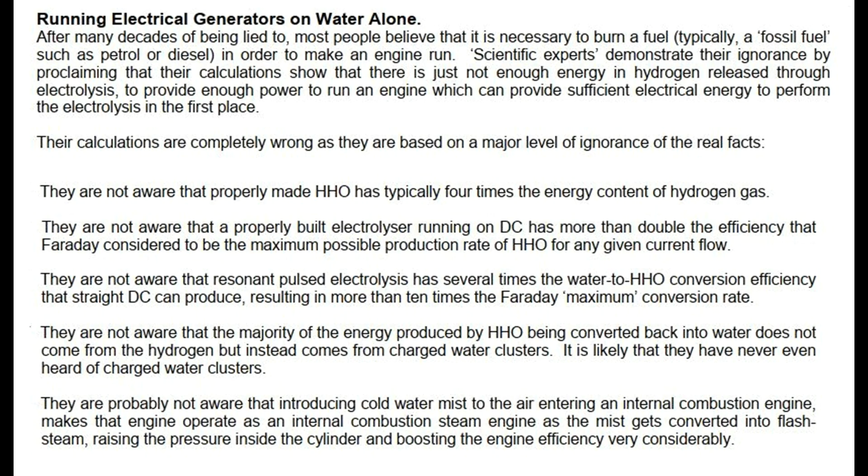They are probably not aware that introducing cold water mist to the air entering an internal combustion engine makes that engine operate as an internal combustion steam engine, as the mist gets converted into flash steam, raising the pressure inside the cylinder and boosting the engine efficiency very considerably.

Because of these things, the calculations of the scientific experts produce completely wrong results due to lack of knowledge and the flawed assumptions on which the calculations are based.

Interestingly, quite apart from the fact that generators running on water as the only visible fuel have been powering off-grid locations 24 hours 7 days a week for many years now, and ignoring that little detail, check out this newspaper comment: U.S. Navy will turn seawater into fuel.

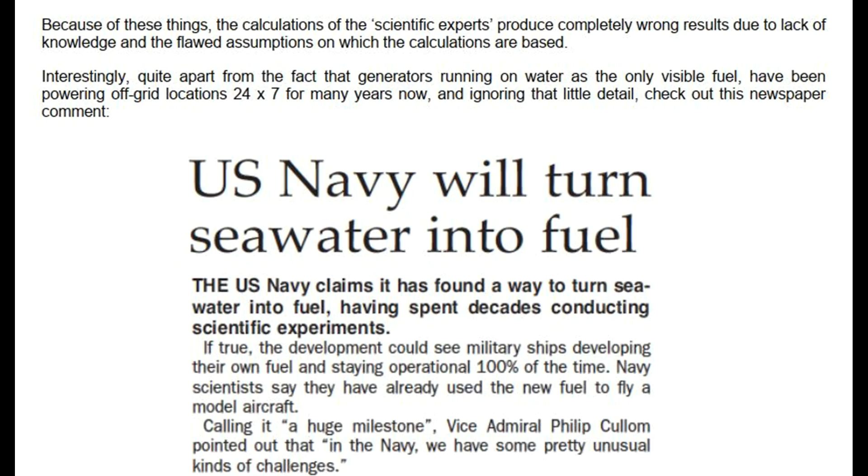The U.S. Navy claims it has found a way to turn seawater into fuel, having spent decades conducting scientific experiments. If true, the development could see military ships developing their own fuel and staying operational 100% of the time. Navy scientists say they have already used the new fuel to fly a model aircraft. Calling it a huge milestone, Vice Admiral Philip Cullom pointed out that in the Navy, we have some pretty unusual kinds of challenges. One of these is the need at present to refuel from an oil tanker. But developing a game-changing technology like seawater to fuel reinvents a lot of the way we can do business when you think about logistics readiness, said Cullom.

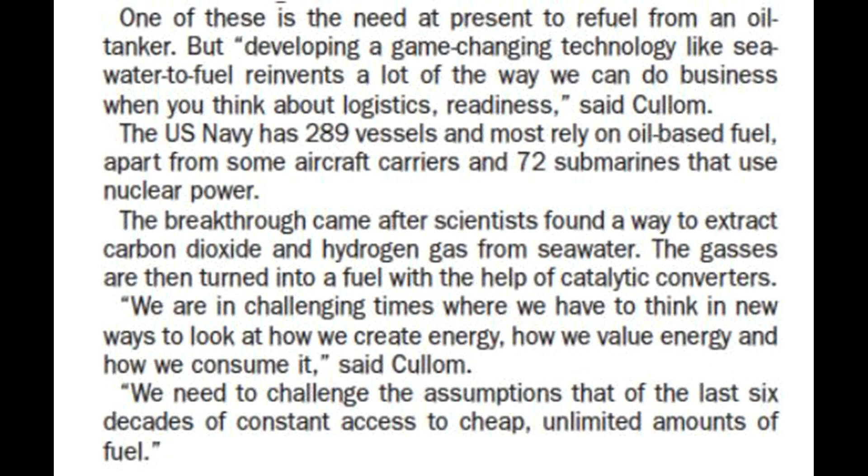The U.S. Navy has 289 vessels, and most rely on oil-based fuel, apart from some aircraft carriers and 72 submarines that use nuclear power. The breakthrough came after scientists found a way to extract carbon dioxide and hydrogen gas from seawater. The gases are then turned into fuel with the help of catalytic converters. We are in challenging times where we have to think in new ways to look at how we create energy, how we value energy and how we consume it, said Cullom. We need to challenge the assumptions of the last 6 decades of constant access to cheap, unlimited amounts of fuel.

This is a very interesting comment from Vice Admiral Cullom. Firstly, he confirms that the Navy's massive engines can be powered by gas produced by electrolysis. Second, he implies very strongly that refueling with oil-based consumables is no longer needed, and that means that the electrolysis is well in excess of 100% efficient, making those massive engines self-powered. Third, it seems reasonable to presume that if those massive engines can be self-powered through electrolysis, that the very much smaller engines in cars could also be run on electrolysis, even if the same method of electrolysis were not used.

Anyway, we have to deal with the tiny, very inefficient motors which are used in generators which normally use petrol as the fuel. In the UK, 3 men managed to run a generator on water alone, using just simple things which are within the scope of the average handyman in his workshop.

They bought a standard petrol-driven electrical generator off eBay and managed to run it without using any petrol. They used a HHO gas flow which they measured at just 3 liters per minute, and they test-loaded the 5.5 kilowatt generator with 4 kilowatts of equipment.

Afterwards they abandoned the generator and moved on to a much bigger engine, as their plans are to sell electricity to the local power company. Their representative said the equipment was put together by his associate, who supplied the water electrolyte, not a standard electrolyte, at 0.4% by volume. It was a 5 kilowatt petrol generator, about 300 cubic centimeters.

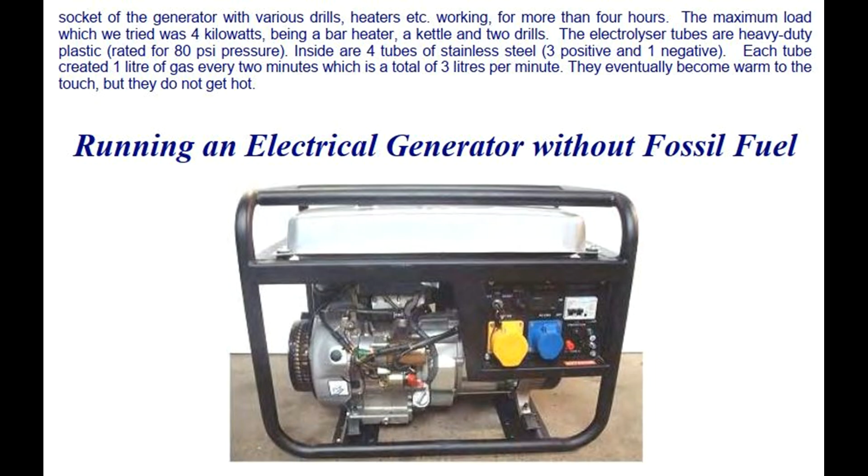Running an electrical generator without fossil fuel, in broad outline: in order to achieve this objective, very much like Stan Meyer, we need to feed the engine 3 things. Air, fed in as normal through the existing air filter. HHO gas, how to make this has already been explained in considerable detail. And a mist of very small water droplets, sometimes called cold water fog.

Also, we need to make 2 adjustments to the engine. The spark timing needs to be retarded by about 11 degrees. If there is a waste spark, then that needs to be eliminated.

To summarize then, a good deal of work needs to be done to achieve this effect. An electrolyzer needs to be built or bought, although the required gas production rate is not particularly high. A generator of cold water fog needs to be made or bought. Pipes need to be installed to carry these 2 items into the engine. The engine timing needs to be retarded. Any waste spark needs to be suppressed.

Water tanks are needed for the cold water fog and to keep the electrolyzer topped up. Ideally, some form of automatic water refill for these water tanks should be provided so that the generator can run for long periods unattended. If we omit the electrical safety equipment which has already been explained in detail, and omit the HHO gas safety equipment which has already been explained in detail, and skip the automated water supply details and the starting battery, then a generalized sketch of the overall arrangement looks like this.

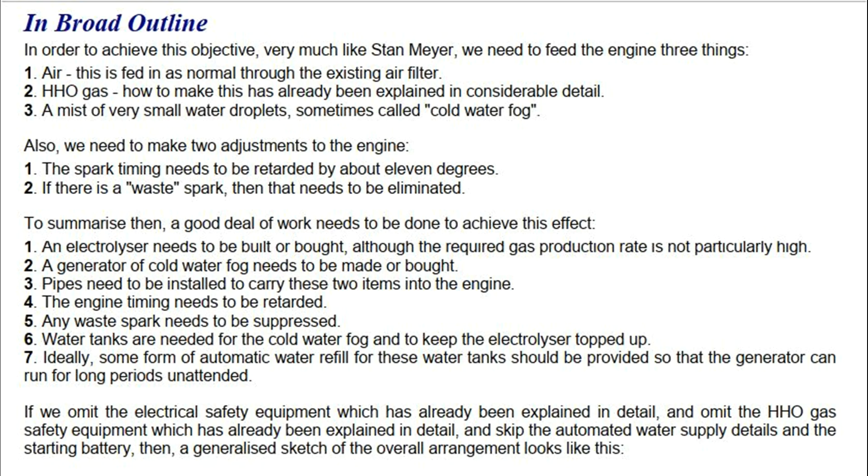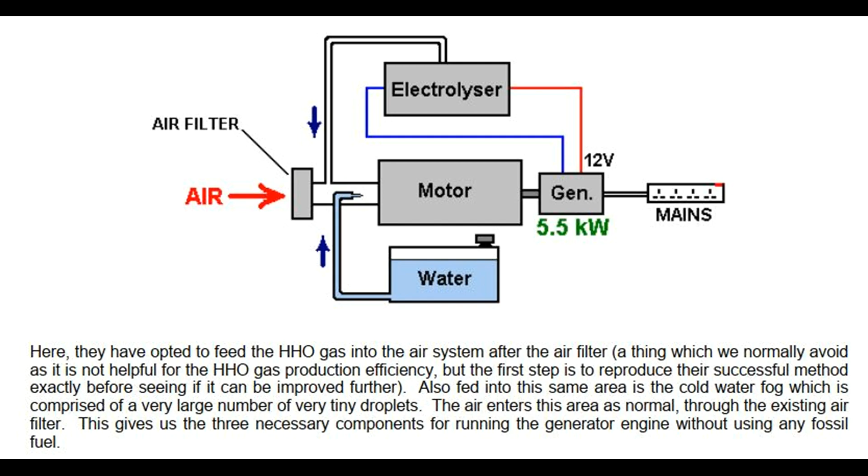Here, they have opted to feed the HHO gas into the air system after the air filter, a thing which we normally avoid as it is not helpful for the HHO gas production efficiency, but the first step is to reproduce their successful method exactly, before seeing if it can be improved further. Also fed into this same area is the cold water fog, which is comprised of a very large number of very tiny droplets. The air enters this area as normal, through the existing air filter. This gives us the 3 necessary components for running the generator engine without using any fossil fuel.

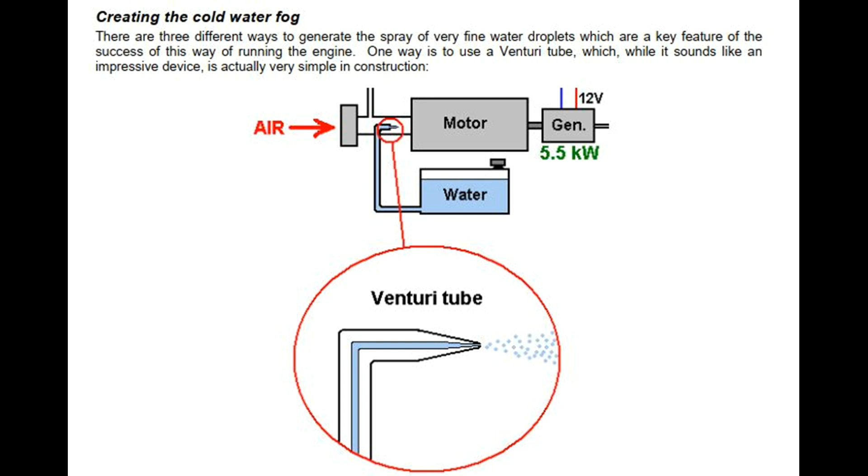Creating the cold water fog: there are 3 different ways to generate the spray of very fine water droplets, which are a key feature of the success of this way of running the engine. One way is to use a Venturi tube, which, while it sounds like an impressive device, is actually very simple in construction. It is just a pipe which tapers to a point and which has a very small nozzle.

As the engine draws in the air HHO mix on its intake stroke, the mixture rushes past the nozzle of the Venturi tube. This creates an area of lower pressure outside the nozzle and causes water to exit through the nozzle in a spray of very fine droplets. Some perfume spray bottles use this method as it is both cheap and effective.

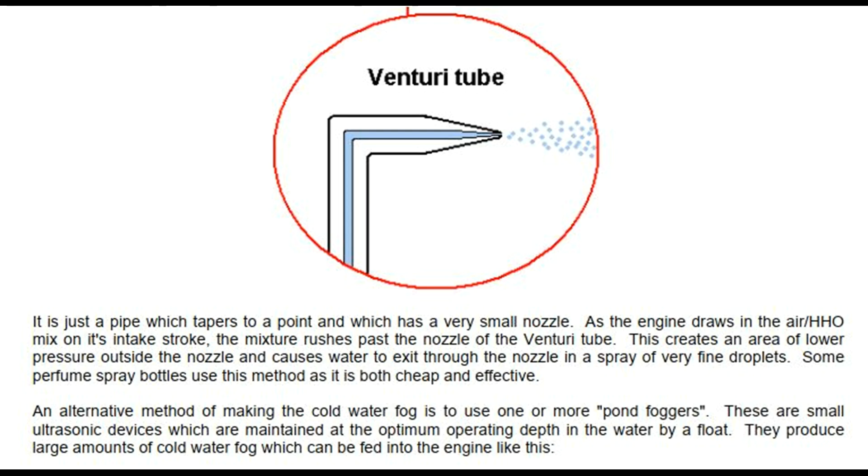An alternative method of making the cold water fog is to use 1 or more pond foggers. These are small ultrasonic devices which are maintained at the optimum operating depth in the water by a float. They produce large amounts of cold water fog which can be fed into the engine like this. A third method is to use a small carburetor of the type used with model aircraft.

This does the same job as a regular engine carburetor, feeding a spray of tiny water droplets into the engine air intake. The physical arrangement of this option depends on the construction of the air filter of the generator being modified. You will notice that the people in the UK who did this used a small gas tank with an 18 pounds per square inch pressure release valve.

This is not possible with the highest quality of HHO gas as it cannot be compressed that much. However, with a lower grade of HHO which has some water vapor mixed in with it, it is possible to have a gas reservoir with that sort of pressure in it. In this case, except possibly for starting, their gas production rate is probably not high enough to allow much raised pressure inside the tank. Obviously, the gas pressure switch on the electrolyzer and the one on the gas storage tank will have similar operational pressures.

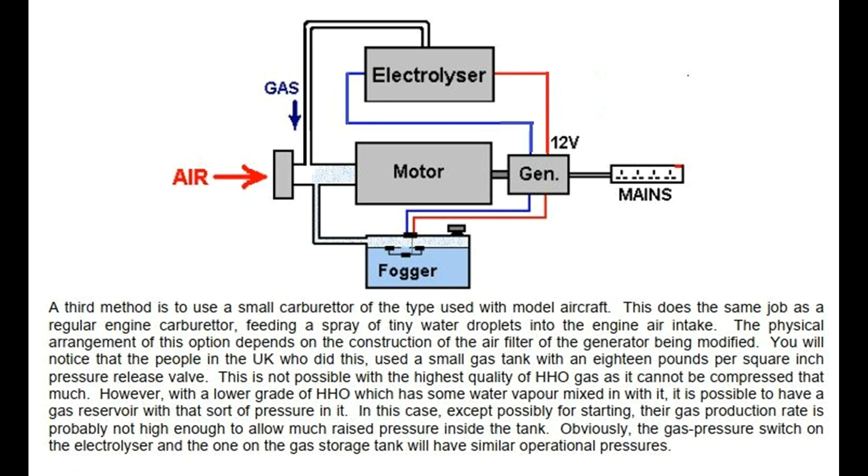Some safety features. Up to this point, the electrolyzer has been shown in bare outline. In practice, it is essential that some safety features are incorporated as shown here. These safety devices should be familiar to you by now as they have already been explained earlier in this document.

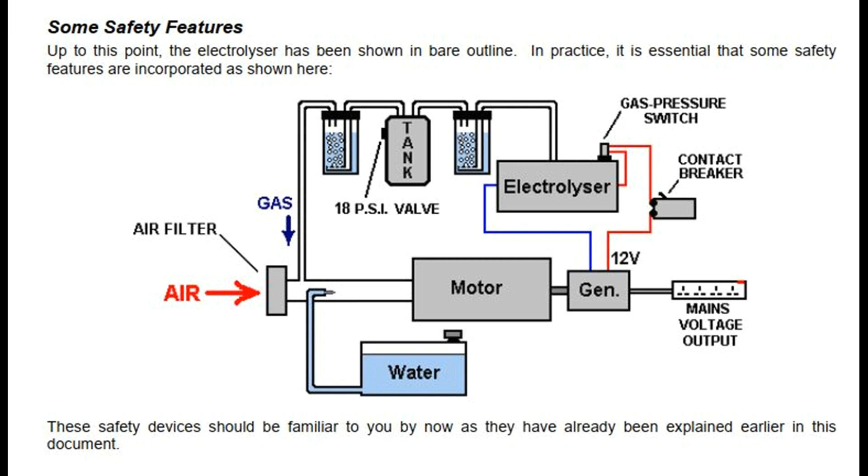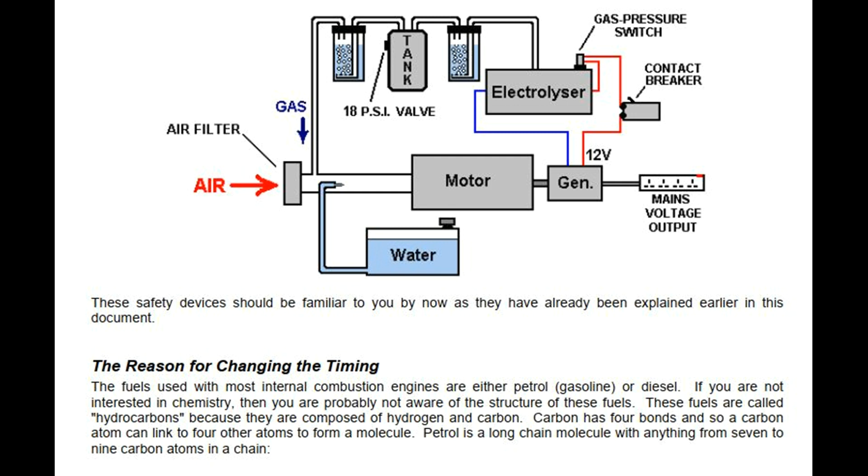The reason for changing the timing. The fuels used with most internal combustion engines are either petrol, gasoline, or diesel. If you are not interested in chemistry, then you are probably not aware of the structure of these fuels. These fuels are called hydrocarbons because they are composed of hydrogen and carbon. Carbon has 4 bonds and so a carbon atom can link to 4 other atoms to form a molecule. Petrol is a long chain molecule with anything from 7 to 9 carbon atoms in a chain. Diesel has the same structure but with 11 to 18 carbon atoms in a chain.

In a petrol engine, a fine spray of petrol is fed into each cylinder during the intake stroke. Ideally, the fuel should be in vapor form, but this is not popular with the oil companies because doing that can give vehicle performances in the 100 to 300 miles per gallon range, and that would cut the profits from oil sales. The petrol in the cylinder is compressed during the compression stroke and that reduces its volume and raises its temperature substantially. The air-fuel mix is then hit with a powerful spark and that provides enough energy to start a chemical reaction between the fuel and the air.

Because the hydrocarbon chain is such a large molecule, it takes a moment for that chain to break up before the individual atoms combine with the oxygen in the air. The main engine power is produced by the hydrogen atoms combining with oxygen, as that reaction produces a large amount of heat. The carbon atoms are not particularly helpful, forming carbon deposits inside the engine, not to mention some carbon monoxide, CO, and some carbon dioxide, CO2, as well.

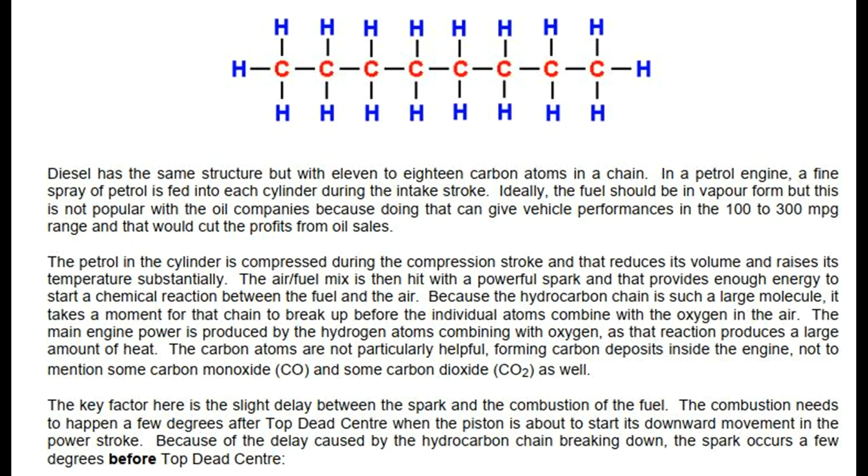The key factor here is the slight delay between the spark and the combustion of the fuel. The combustion needs to happen a few degrees after top dead center when the piston is about to start its downward movement in the power stroke. Because of the delay caused by the hydrocarbon chain breaking down, the spark occurs a few degrees before top dead center.

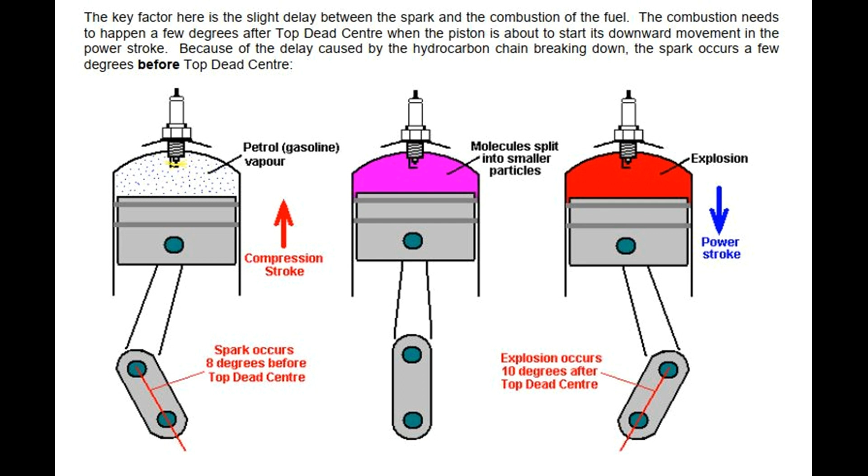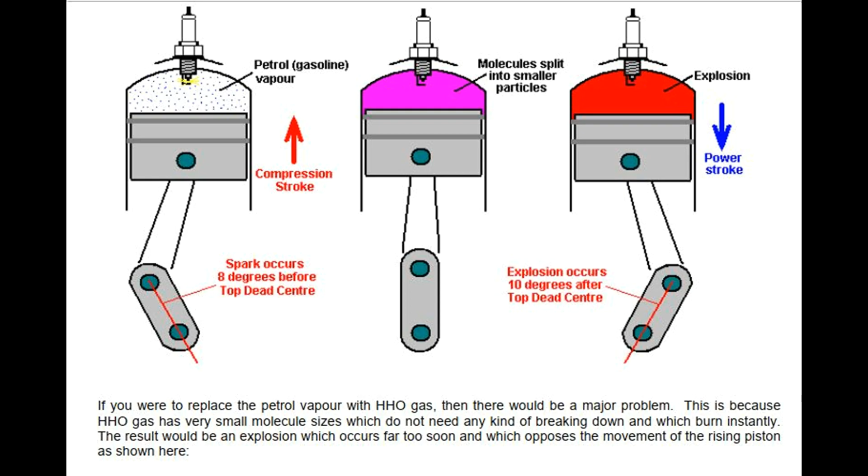If you were to replace the petrol vapor with HHO gas, then there would be a major problem. This is because HHO gas has very small molecule sizes which do not need any kind of breaking down and which burn instantly. The result would be an explosion which occurs far too soon and which opposes the movement of the rising piston, as shown here. The forces imposed on the piston's connecting rod would be so high that it would be quite liable to break and cause additional engine damage.

In the case of our electrical generator, we will not be feeding it a mix of air and HHO gas, but instead a mix of air, HHO gas, and cold water fog. This delays the combustion of the HHO gas by a small amount, but it is still important to have the spark occur after top dead center, so the ignition of the generator needs to be retarded by 11 degrees.

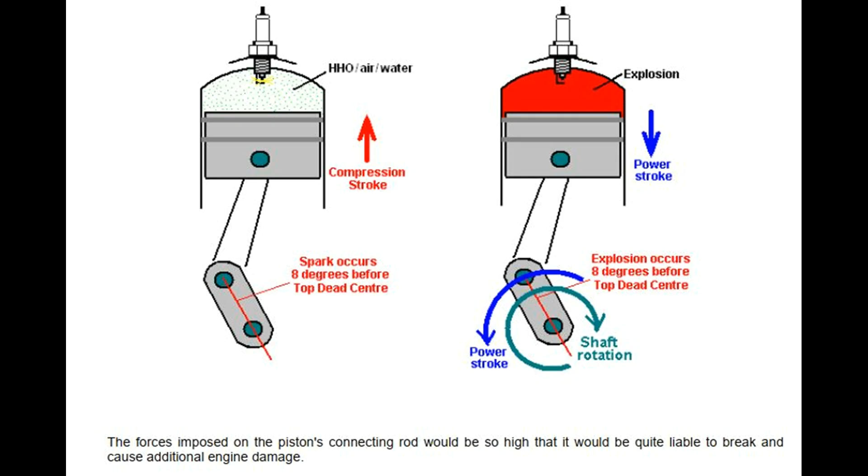Engine design varies considerably in ways which are not obvious to a quick glance at the engine. The timing of the valves is a big factor here. In the smallest and cheapest engines, the engine design is simplified by not having the spark timing taken off the camshaft. Instead, production costs are cut by taking the spark timing off the output shaft. This produces a spark on every revolution of the engine. But if it is a 4-stroke engine, the spark should only occur on the power stroke, which is every second revolution of the output shaft.

If the fuel is petrol, then this does not matter as the extra spark will occur near the end of the exhaust stroke when only burnt gases are present in the cylinder.

Some people are concerned when they think of HHO gas burning and producing water inside the engine. They think of hydrogen embrittlement and rusting. However, because of the nature of the hydrocarbon fuel already being used, the engine runs primarily on hydrogen anyway, and it always has produced water.

The water is in the form of very hot vapor or steam, and the engine heat dries it out when the engine is stopped. Hydrogen embrittlement does not occur as a result of using a HHO gas booster.

If we were to delay the spark until after top dead center, as we must, the situation is quite different, as the waste spark will also be delayed by the same amount. With most engines, at this point the exhaust valve will have closed and the intake valve opened. Our flammable gas mix will be fed into the engine on its intake stroke, meaning our gas supply system is openly connected to the cylinder through the open intake valve. The waste spark would ignite our gas supply system as far as the bubbler, which would smother the flashback. The situation is shown here. We definitely do not want that to happen, so it is very important that we suppress that additional waste spark.

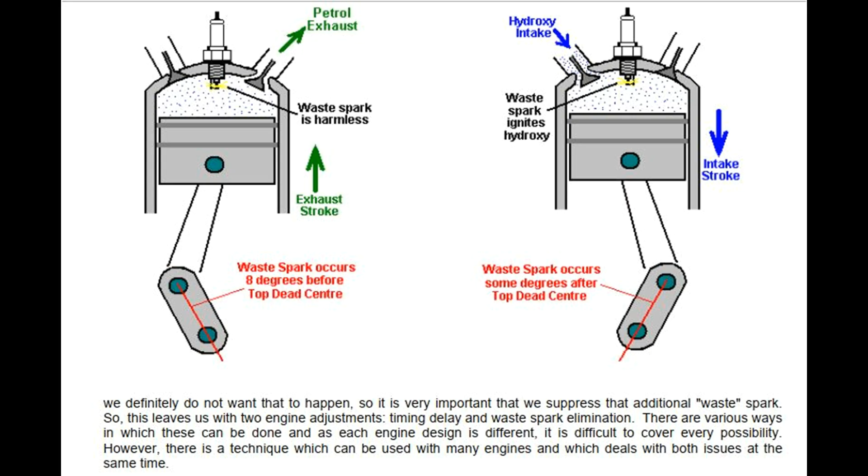Most engines of this type are four-stroke engines with intake and exhaust valves, perhaps something like this. The intake valve, shown on the right in this illustration, is pushed down by a camshaft, compressing the spring and opening the inlet port. The exact arrangement will differ from one engine design to the next, but what is fixed is the movement of the valve itself, and that movement only takes place every second revolution. There are various ways of using that movement to eliminate the waste spark and retard the timing.

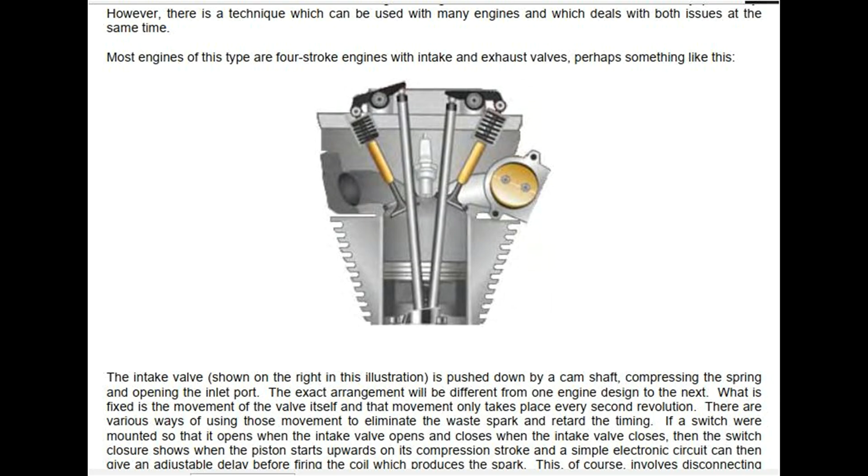If a switch were mounted so that it opens when the intake valve opens and closes when the intake valve closes, then the switch closure shows when the piston starts upwards on its compression stroke, and a simple electronic circuit can then give an adjustable delay before firing the coil which produces the spark. This involves disconnecting the original electrical circuit so that no waste spark is generated. The current flowing through the switch contacts can be arranged to be so low that there will be no sparking at the contacts when the circuit is broken again.

If the engine did not have a waste spark, then in theory the timing mechanism of the engine could be used to retard the spark. However, in practice, the timing mechanism is almost never capable of retarding the spark to the position needed for running without fossil fuel, so some kind of delay circuit will be needed anyway.

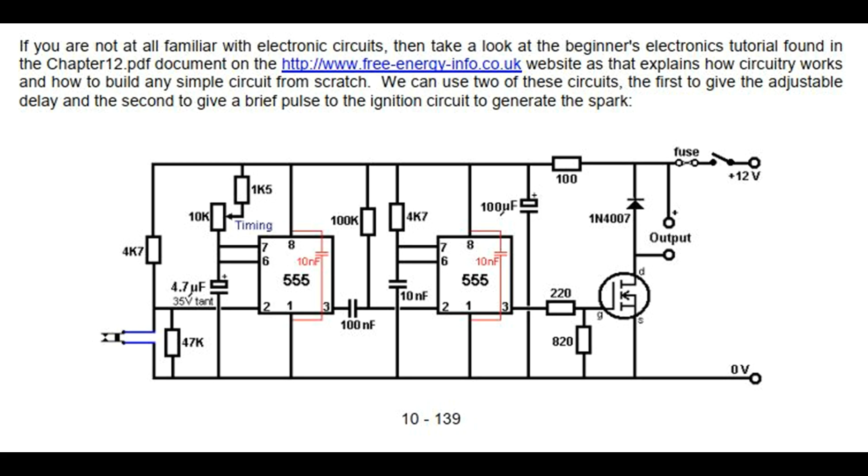We can use two of these circuits: the first to give the adjustable delay, and the second to give a brief pulse to the ignition circuit to generate the spark.

Making the HHO gas. When the generator is running, we have a ready supply of electrical energy coming from equipment specifically designed to supply large quantities of electricity for any required application. We are not dealing with the spare capacity of some low-grade alternator in a car, but substantial electrical power available. Having said that, the electrolyzers described at the start of this document are efficient, and it is unlikely that an excessive amount of power would be needed when using one of those designs.

Another convenient factor is that this is a stationary application, so the size and weight of the electrolyzer is not at all important, and this gives us further flexibility in our choice of dimensions.

As this is an application where it is highly likely that the electrolyzer will be operated for long periods unattended, an automated water supply system should be provided. The main details of such a system have already been covered, but what has not yet been dealt with is the switching for the water pump.

The water pump itself can be an ordinary windscreen washer pump, and we need some form of switch which operates on the electrolyte level inside the electrolyzer. It is sufficient to sense the level in just one of the cells, as the water usage will be pretty much the same in every cell.

If you make the electrolyzer in a suitable size or shape, then a simple off-the-shelf miniature float switch can be used. If you prefer, an electronic level sensor can be operated, using 2 bolts through the side of the electrolyzer as the level sensor. A suitable circuit for this simple switching task could be used.

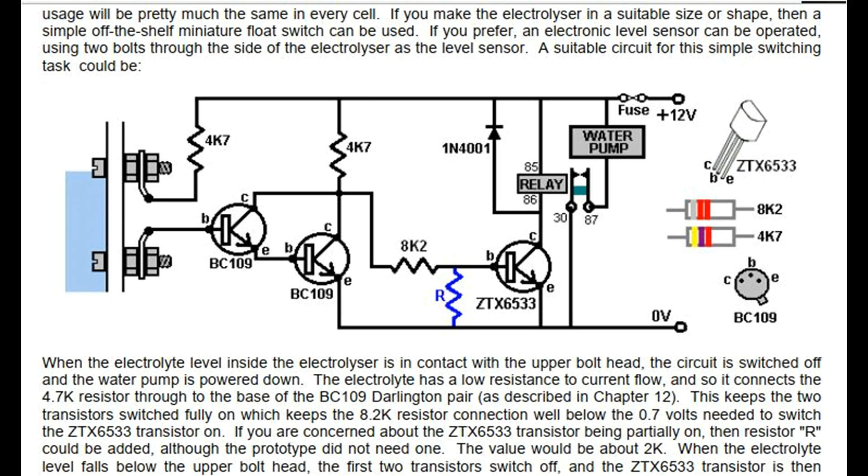When the electrolyte level falls below the upper bolt head, the first 2 transistors switch off, and the ZTX6533 transistor is then powered fully on by the 4.7 kilo-ohm resistor and the 8.2 kilo-ohm resistor in series, providing the 150 milliamps needed for the relay to be switched fully on. The circuit draws about 5 milliamps in its standby state.

The numbers on the relay symbol correspond to the numbers on a typical automotive 12-volt relay. Using 2 BC109 transistors as the front end allows the circuit to be used with tap water if you wish.

However, the water level control for the water supply to the pond fogger or Venturi tube misting device does not need any form of fancy mechanism. The standard ball-cock valve mechanism used with toilets is quite adequate, especially if a floating pond fogger is being used, as it maintains its own optimum depth below the surface, so the overall depth is not critical.

Starting: when left for any length of time, the gas pressure inside the electrolyzer will drop because the nature of the HHO gas alters. This means there will not be sufficient HHO gas available to start the engine, and no more gas will be generated until the engine drives the generator.

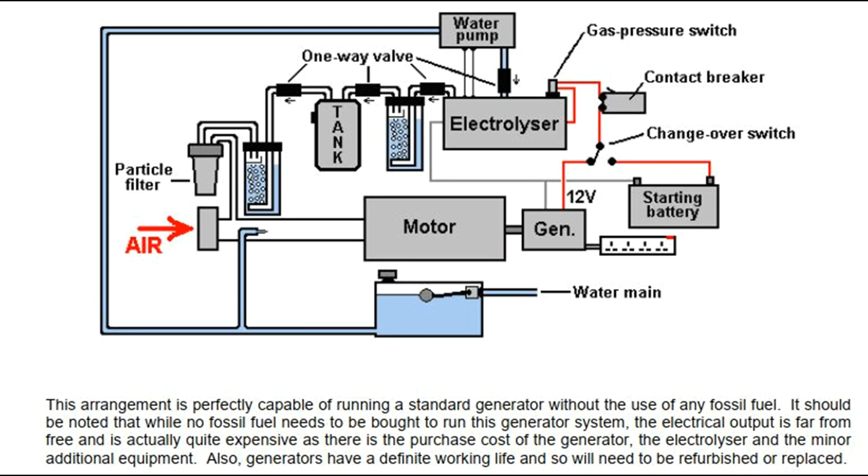The alteration was achieved by cutting a new channel in the shaft, allowing the timing disc to be positioned further around the shaft, producing the required timing delay. This arrangement also makes the waste spark ineffective, so it can be ignored. While this method requires the cutting of a slot, it does away with the need for any electronics, and it is a very simple solution.

If you feel that the construction of a suitable electrolyzer would be a problem, or that the amount of electric current needed to operate it would be excessive, let me show you the actual figures involved. Michael Faraday was an exceptional and highly respected researcher who investigated the electric current needed to convert water into hydrogen gas and oxygen gas by electrolysis.

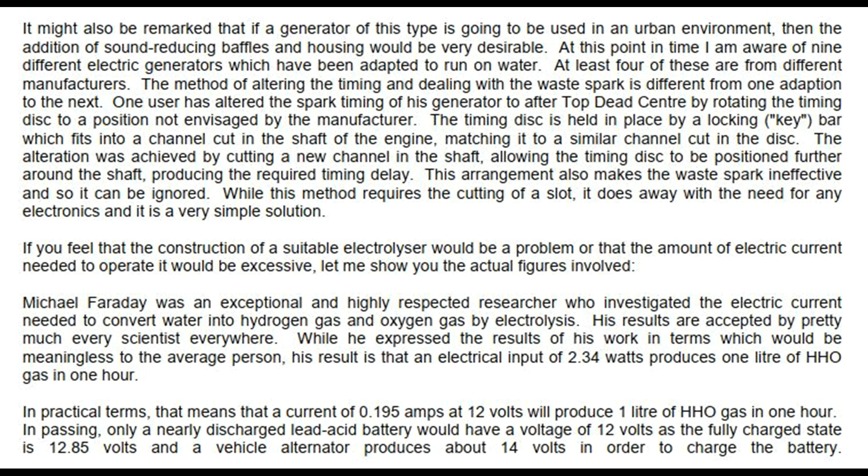His results are accepted by pretty much every scientist everywhere. While he expressed the results of his work in terms which would be meaningless to the average person, his result is that an electrical input of 2.34 watts produces 1 liter of HHO gas in 1 hour. In practical terms, that means that a current of 0.195 amps at 12 volts will produce 1 liter of HHO gas in 1 hour.

Only a nearly discharged lead-acid battery would have a voltage of 12 volts, as the fully charged state is 12.85 volts, and a vehicle alternator produces about 14 volts in order to charge the battery. It is easier then to compare the gas output of electrolyzers directly to the figures produced by Faraday, based on a gas output of 15 liters per minute, which is 900 liters per hour.

Faraday: 900 liters in 1 hour takes 2106 watts, or 100% Faraday. Boyce: 900 liters in 1 hour takes 998 watts, or 211% Faraday without pulsing. Boyce: 900 liters in 1 hour takes 180 watts, or 1170% Faraday with pulsing. Cramton: 900 liters in 1 hour takes 90 watts, or 2340% Faraday.

Much of this is not very important, as it has been demonstrated that a gas production rate of around 3 liters per minute, 180 liters per hour, is sufficient to run a generator which produces 5,500 watts. Let us assume that the measured figure is 100% wrong and that it takes 360 liters per hour of HHO gas, plus cold water fog, plus air, to run the generator. Then Faraday would need 843 watts.

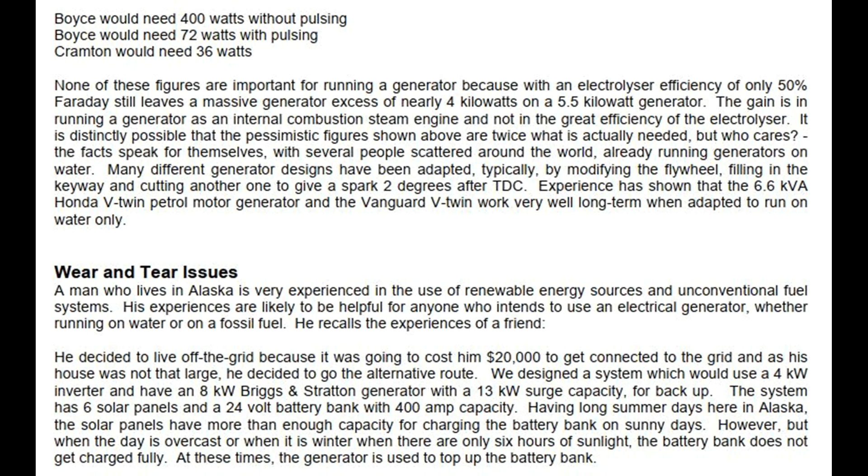American generators normally have either 2 or 4 120-volt outputs each rated at 15 amps, plus one 240-volt output rated at 33 amps. If one of the two 120-volt outputs is used to charge the battery bank, then you're left with just the other 120-volt output for any other power needs during charging. This is not satisfactory, as operating with one field at maximum power and the other lightly loaded or unused causes a field imbalance in the generator, engine crank imbalance, and ring or regulator failure within 6 months. It also causes noisy running and excessive fuel consumption.

Run in this way, providing a 60 amp charge rate, the generator ran hard and loud for 2 to 2.5 hours per day, and running it was costing $350 per month for gasoline. The generator failed after 4 months. In order to balance the loading on the replacement generator, a 15 kVA step-down transformer costing less than $1,000 was purchased so that the 240-volt output could be used to drive 120-volt equipment.

A transformer used for this needs to have a power handling capacity greater than the surge capacity of the generator. A major advantage is that the generator current is halved for any given level of equipment current drawn, because the equipment is running at only half of the generator voltage.

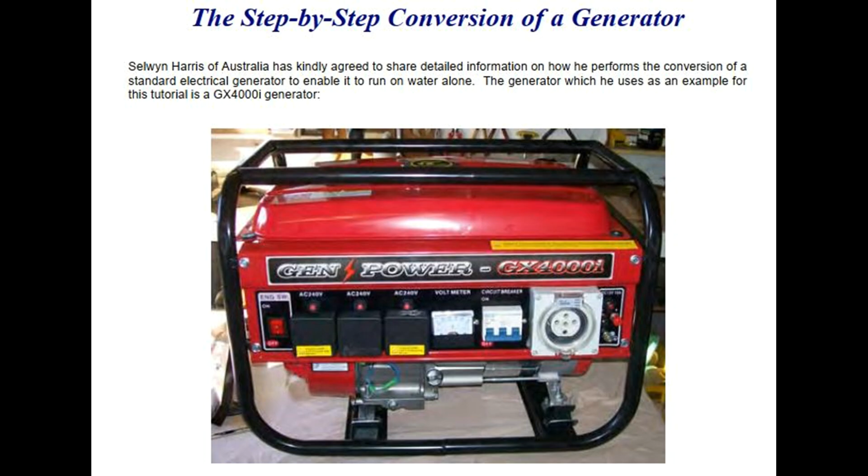GX4000i portable type generators have smoother output power, comparable to public utility sources. Ideal for powering medium loads such as power tools, both single and 3-phase, game consoles, digital cameras, laptops, camcorders, lighting, microwave ovens, drills, grinders, and resistive load kitchen appliances such as coffee makers and toasters. Also suitable for emergency home backup power where 240-volt power is required. These units are also significantly quieter than others due to refined engine technology.

Features: commercial grade engine, 196 cubic centimeter 4-stroke, 7 horsepower, overhead camshaft, TCI ignition. Maximum output 4.0 kV ampere at 240 or 415 volts AC, rated output 2.7 kilowatts. Quality heavy-duty construction, AVR auto voltage regulator, 3 240-volt and 1 415-volt protected outlets, 100% pure copper core, gearless direct drive, robust square frame design, easy recoil start. Oil capacity 0.7 liters, powder coated finish, light and compact for easy maneuverability at 38.5 kilograms, noise level 69 decibels.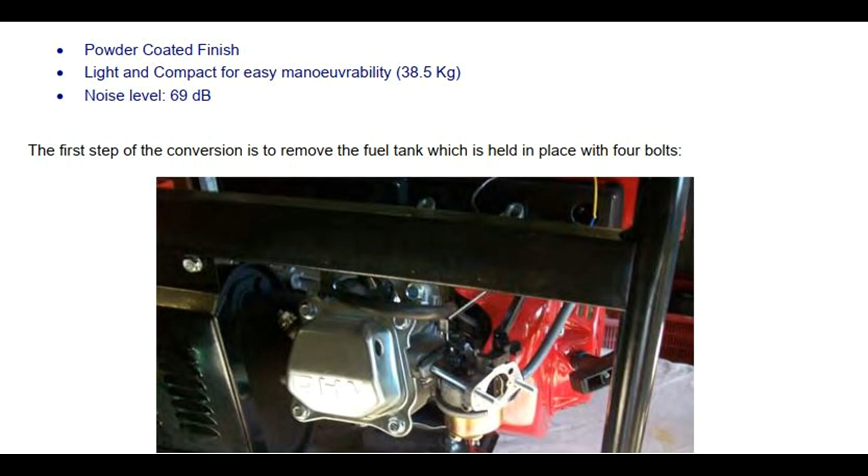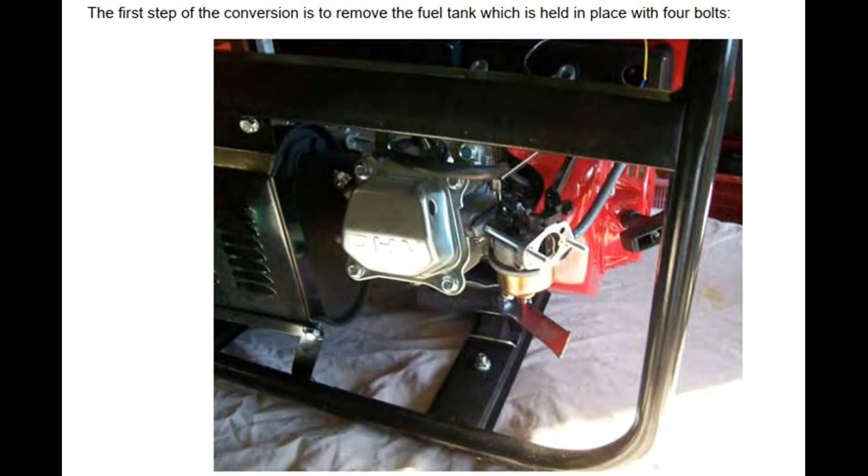The first step of the conversion is to remove the fuel tank, which is held in place with 4 bolts. This allows access to the carburetor, which is then removed as it will not be used.

The next step is to construct a pressure release valve mechanism which will protect the equipment from damage in the unlikely event of a major, sudden rise in pressure caused by the unwanted ignition of the HHO gas mix used to power the generator. For this, parts are purchased from the local hardware store.

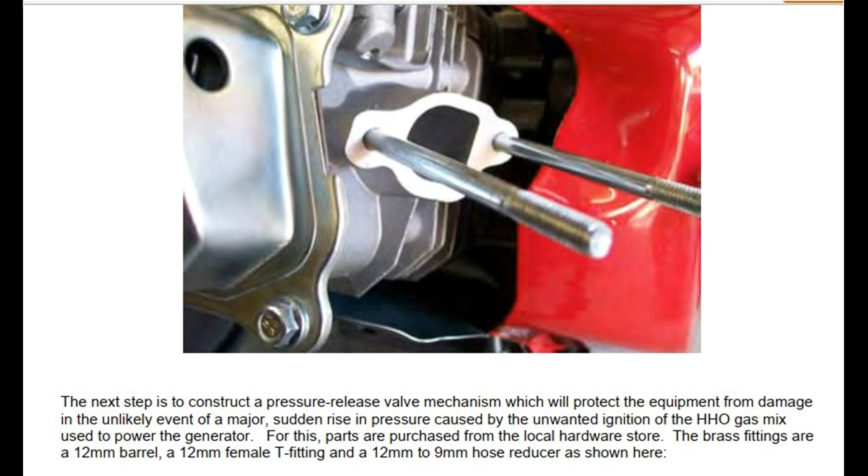The brass fittings are a 12mm barrel, a 12mm female T-fitting, and a 12mm to 9mm hose reducer, as shown here. The polyvinyl chloride plastic fittings are a 1/2 to 1-1/4 reducer and a 1-1/4 end cap, along with the roller ball from an old-fashioned mouse and a relatively weak compression spring to hold the ball in place during normal operation where the gas pressure is low.

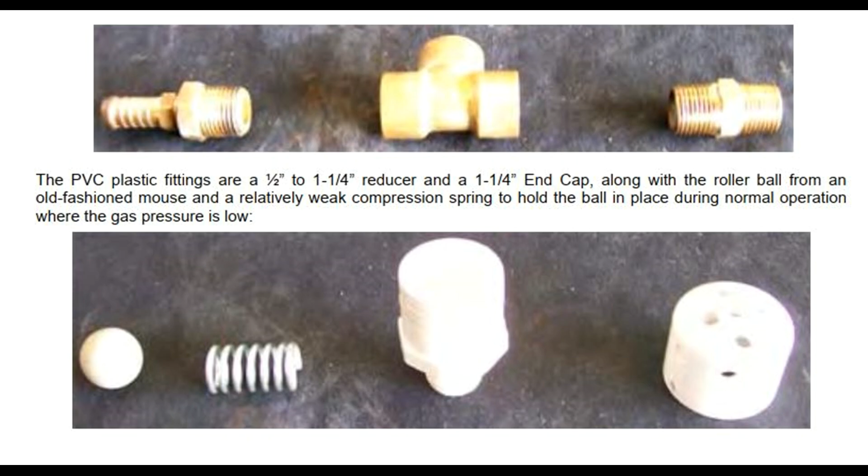These components are then assembled to produce the pressure release valve. The inside of the flash arrestor looks like this: drilled vent holes, polyvinyl chloride cap, weak spring, roller ball, and female thread brass T-piece.

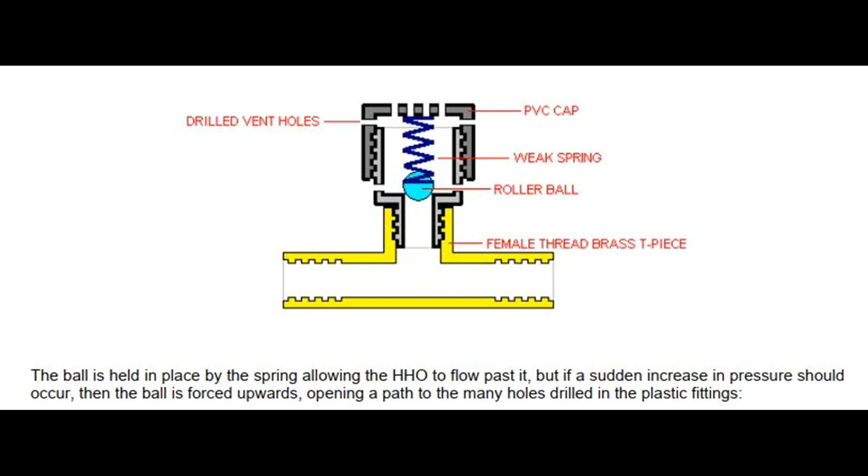The ball is held in place by the spring, allowing the HHO to flow past it, but if a sudden increase in pressure should occur, the ball is forced upwards, opening a path to the many holes drilled in the plastic fittings. When the gas pressure drops again, the spring pushes the roller ball down to seal off the pressure release holes.

However, Selwyn adds an additional spring-loaded valve to the arrangement. This one is there in case the electrolyzer fails to produce a sufficient volume of gas in the event of a sudden increase in demand. This valve is marked as a vacuum relief valve, although, strictly speaking, it deals with reduced pressure rather than an actual vacuum. The arrangement is shown below.

Please take note that Selwyn uses the Hogg style of electrolyzer, and that design has a bubbler built into it, so if you are using some other design of electrolyzer, please be sure to use at least one bubbler between the electrolyzer and the engine, in spite of the fact that there is very little chance of the engine misfiring and igniting the HHO gas in the electrolyzer.

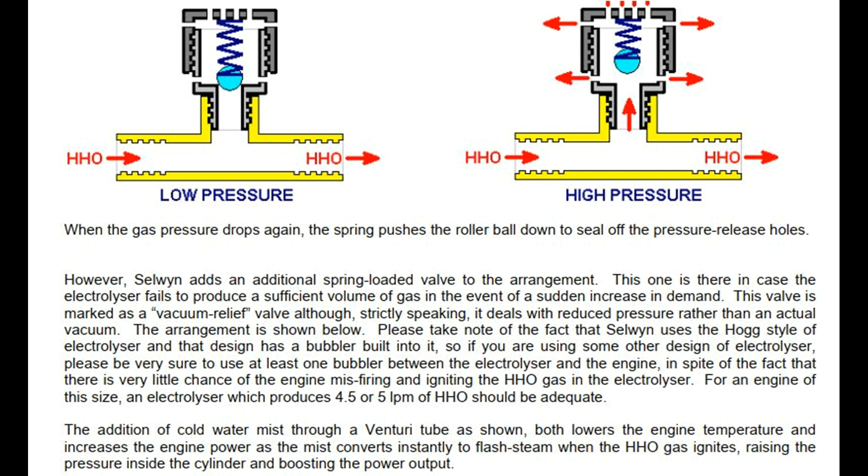For an engine of this size, an electrolyzer which produces 4.5 or 5 liters per minute of HHO should be adequate. The addition of cold water mist through a Venturi tube, as shown, both lowers the engine temperature and increases the engine power, as the mist converts instantly to flash steam when the HHO gas ignites, raising the pressure inside the cylinder and boosting the power output.

Next, a piece of 6 mm thick aluminium plate is cut and shaped to the size of the carburetor gasket, which is not a symmetrical item. This is done by tracing the gasket and transferring it onto the aluminium plate, drilling the holes, and then cutting out the outlined shape. The edges are then filed to create a nice fit on the engine port.

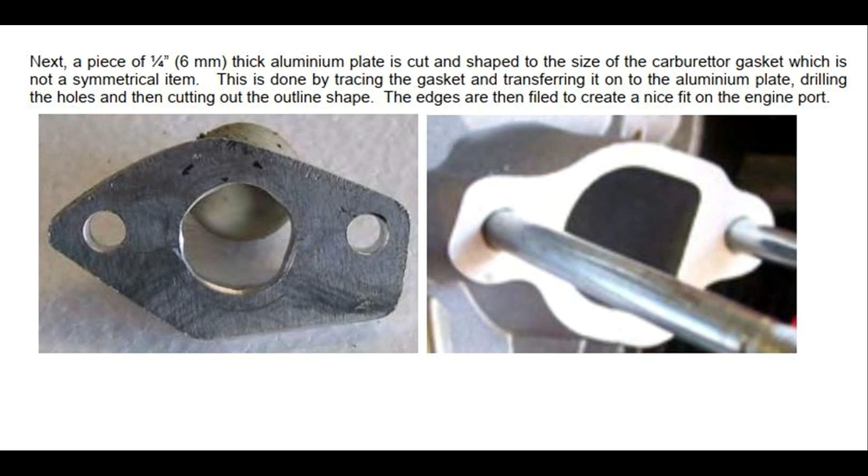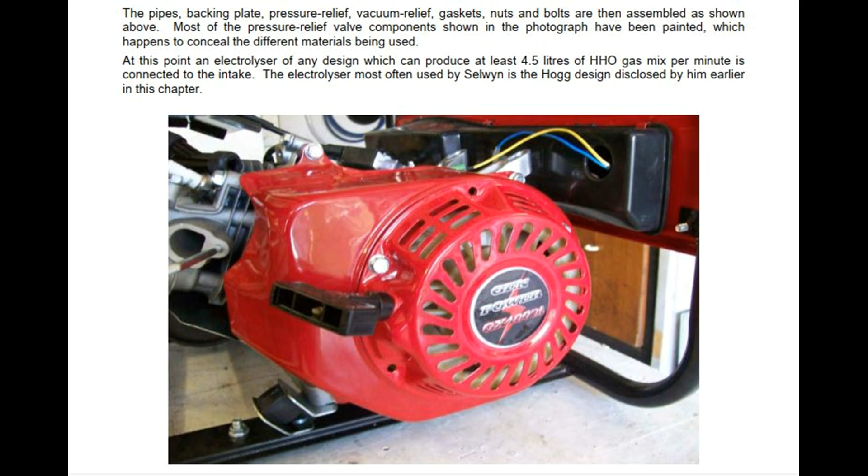The electrolyzer most often used by Selwyn is the Hogg design disclosed by him earlier in this chapter. The manual pull start and the generator cover are now removed. It is only necessary to remove 4 of the bolts to take the cover off. This is the engine with the starter pull and the blower cover removed.

At A you can see the magnetic pulse type transistor discharge ignition pickup in its original position, bolted in place at 8 degrees before top dead center. This needs to be removed and an aluminium plate inserted to allow the transistor discharge ignition to be mounted in its new position.

Because of the new fuel, it is necessary to retard the ignition system. This can be done in one of 2 ways, neither of which is particularly easy, so you may need the help of an engineering shop. The easiest way is to modify the installed ignition to top dead center.

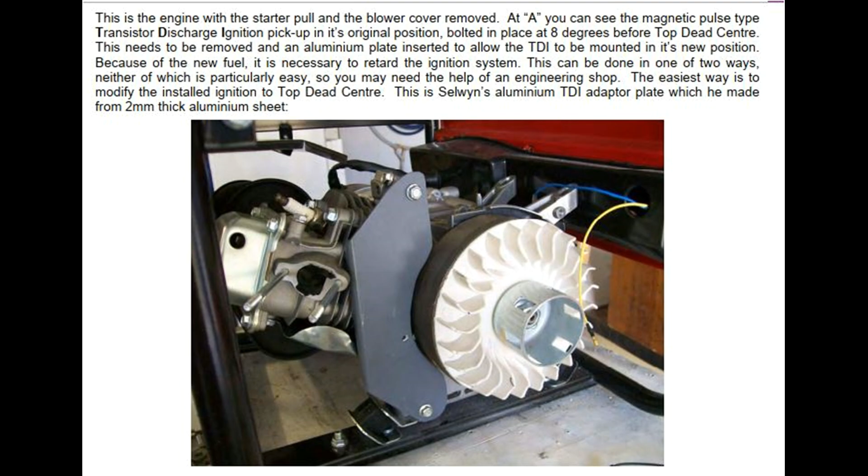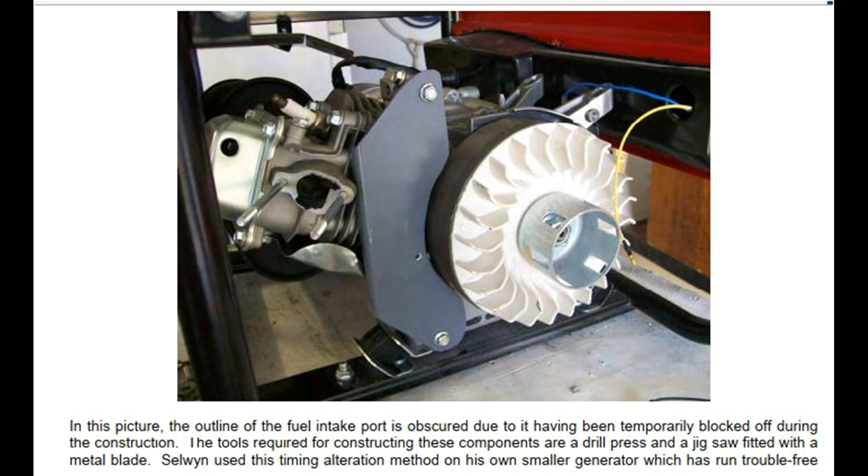This is Selwyn's aluminium transistor discharge ignition adapter plate, which he made from 2 mm thick aluminium sheet. In this picture, the outline of the fuel intake port is obscured due to it having been temporarily blocked off during the construction. The tools required for constructing these components are a drill press and a jigsaw fitted with a metal blade.

Selwyn used this timing alteration method on his own smaller generator, which has run trouble-free for a year. The objective is to delay the ignition spark from 8 degrees before top dead center to either top dead center or to 1 degree after top dead center.

This allows for a good spark on the compression stroke, and when the waste spark occurs, the inlet valve has not yet opened, so there is no HHO in the ignition area. That is to say, the exhaust valve has just closed and the inlet valve has not yet opened. This results in a good compression stroke for the HHO and does not try to send the piston backwards due to premature ignition of the gas mix.

The above picture shows the aluminium plate mounted and ready to accept the pickup. This plate needs to have air holes drilled in it in order to allow cooling air to flow over the engine fins behind it. The transistor discharge ignition adapter plate looks like this.

As shown below, the support plate is drilled with the ventilation holes. In this photograph, the adapter plate is just resting on the support plate. Later, when the top dead center timing position is established, the adapter plate will be bolted to it using the 3 holes top and bottom on the white plate. This locks the timing to that setting and the timing is never changed.

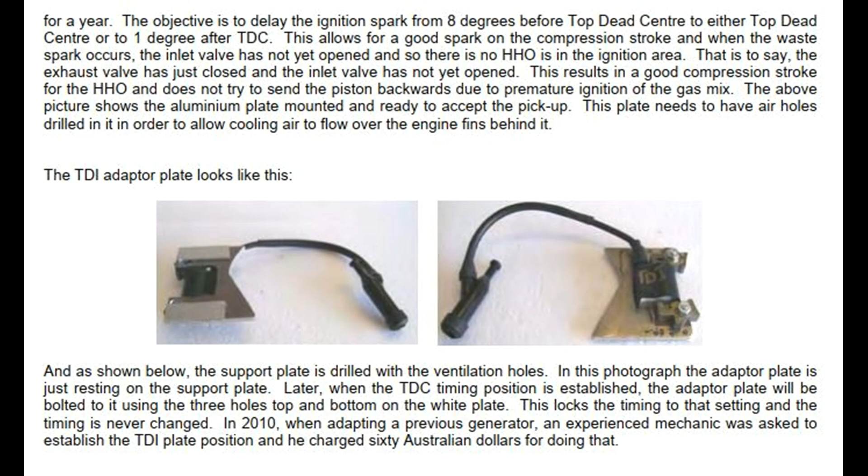In 2010, when adapting a previous generator, an experienced mechanic was asked to establish the transistor discharge ignition plate position, and he charged $60 for doing that. Finally, the covers and the starter handle need to be bolted back in place.

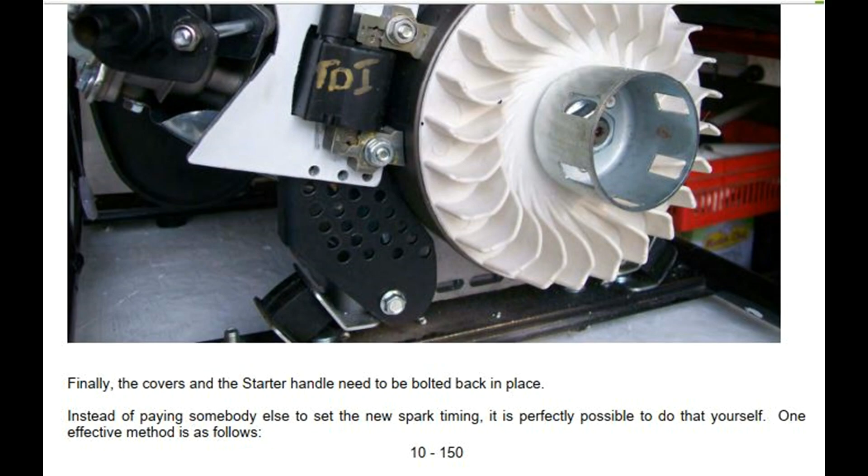Instead of paying somebody else to set the new spark timing, it is perfectly possible to do that yourself. One effective method is as follows. Mark the casing of the engine in a convenient location as shown in yellow in this photograph.

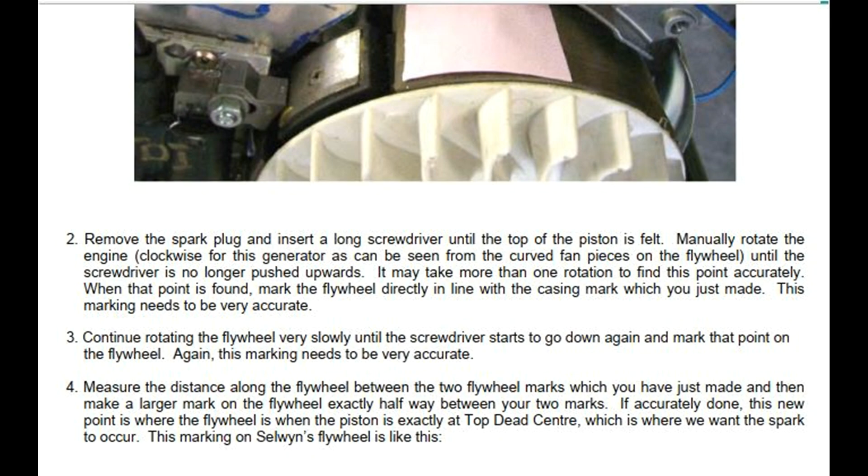Remove the spark plug and insert a long screwdriver until the top of the piston is felt. Manually rotate the engine, clockwise for this generator as can be seen from the curved fan pieces on the flywheel, until the screwdriver is no longer pushed upwards. It may take more than one rotation to find this point accurately.

When that point is found, mark the flywheel directly in line with the casing mark which you just made. This marking needs to be very accurate. Continue rotating the flywheel very slowly until the screwdriver starts to go down again and mark that point on the flywheel. Again, this marking needs to be very accurate.

Measure the distance along the flywheel between the 2 flywheel marks which you have just made, and then make a larger mark on the flywheel exactly halfway between your 2 marks.

If accurately done, this new point is where the flywheel is when the piston is exactly at top dead center, which is where we want the spark to occur. This marking on Selwyn's flywheel looks like this.

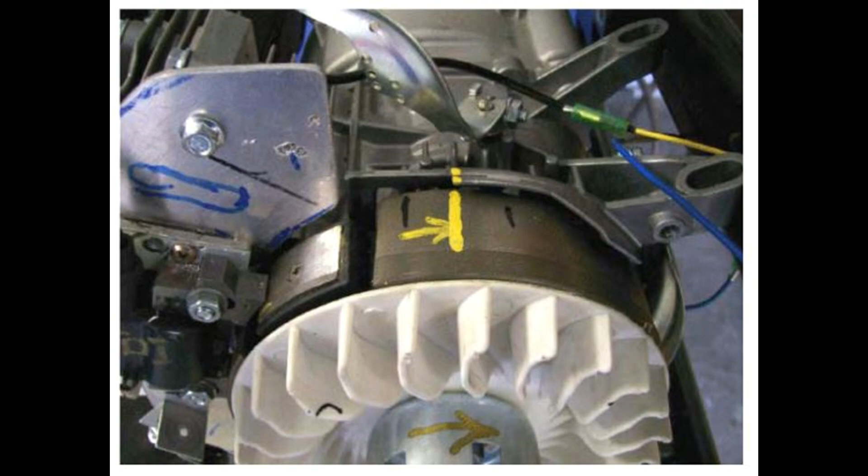Next comes a bit of arithmetic. The diameter of the flywheel is 180 mm, so its circumference is 3.14159 multiplied by 180, equaling 565.5 mm. As there are 360 degrees in each rotation, the outside edge of the flywheel moves 1.57 mm for each degree.

The engine specification states the spark timing is 8 degrees before top dead center, and we want the spark to occur exactly at top dead center. This means we want 8 multiplied by 1.57, equaling 12.5 mm of flywheel circumference to have passed before the spark occurs. To achieve this delay, the transistor discharge ignition needs to be moved 12.5 mm in the direction the flywheel rotates.

You'll notice that for this major timing change, the transistor discharge ignition adjustment is very small, only half an inch. Once the adjustment has been made, the timing can be checked using an automotive timing light connected to the spark plug lead. The engine can be spun using an electric drill.

As the flywheel spins fast and the flash from the timing light is very short, it makes the flywheel mark appear stationary despite passing by rapidly. If the transistor discharge ignition adjustment is correct, the central mark on the flywheel will appear stationary and exactly aligned with the mark on the casing.

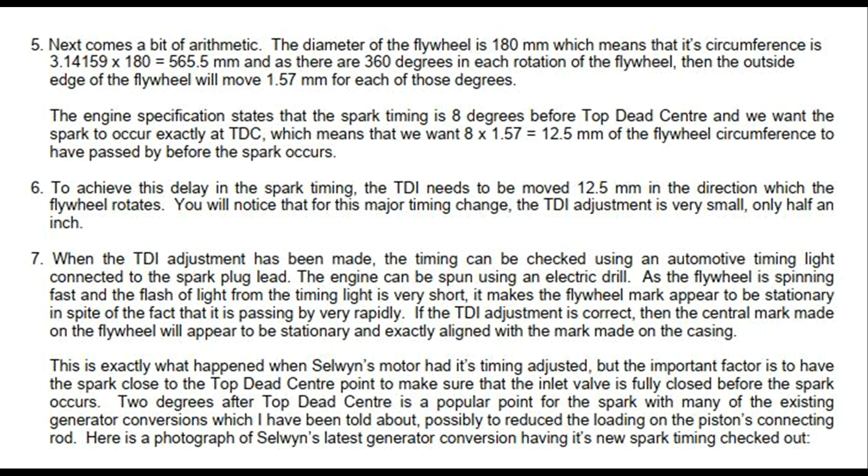Here is a photograph of Selwyn's latest generator conversion having its new spark timing checked out. Most small petrol engines have the spark timing set between 8 degrees and 10 degrees before top dead center.

If you don't know the timing of your particular generator, complete the flywheel marking procedure of step 4 above, but make 3 additional marks on each side of the top dead center mark. Space those marks 1.5 mm apart, as they will form a scale showing each degree from 3 degrees before top dead center to 3 degrees after top dead center.

When the timing light is used, it shows exactly where the spark occurs. If the engine had an original spark timing that was not 8 degrees before top dead center, the scale immediately shows how much further the transistor discharge ignition needs to be moved to set the spark exactly where you want it to occur.

The cold water mist. Getting fine droplets of water into the engine can be done two different ways. The first is to use a Venturi tube, which generates a fine spray of droplets when air moves rapidly past a small water-filled hole. You may not have noticed, but this method has been used extensively in perfume sprays, and it is very effective.

Selwyn describes how he constructs a Venturi tube. A short length of 1/4 inch, 5 or 6 mm diameter copper tubing is used. This is generally available as central heating supplies, and if there's any difficulty finding some, your local garage can probably direct you to a supplier, if they don't just give you a short length from their own supply.

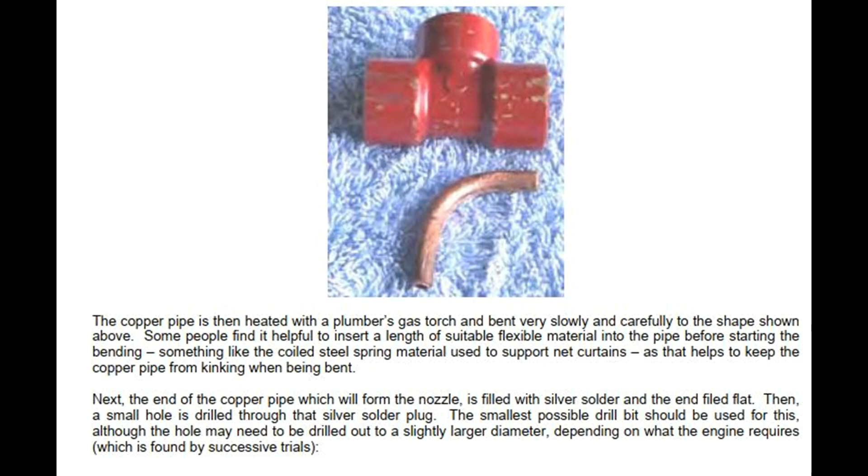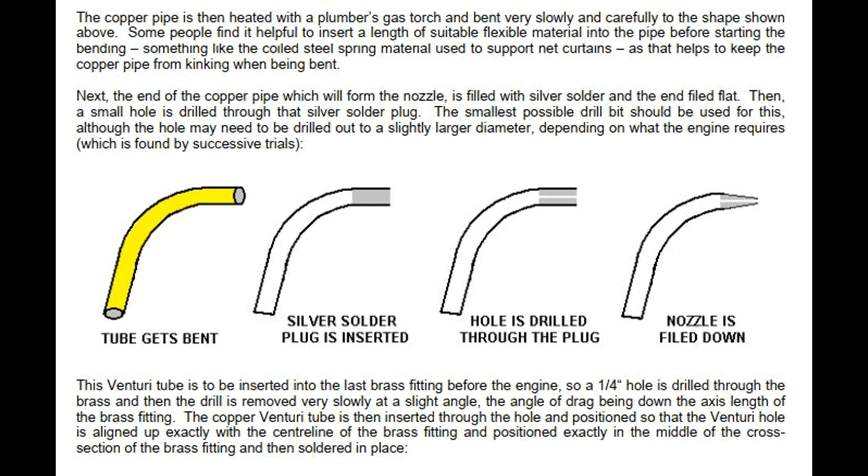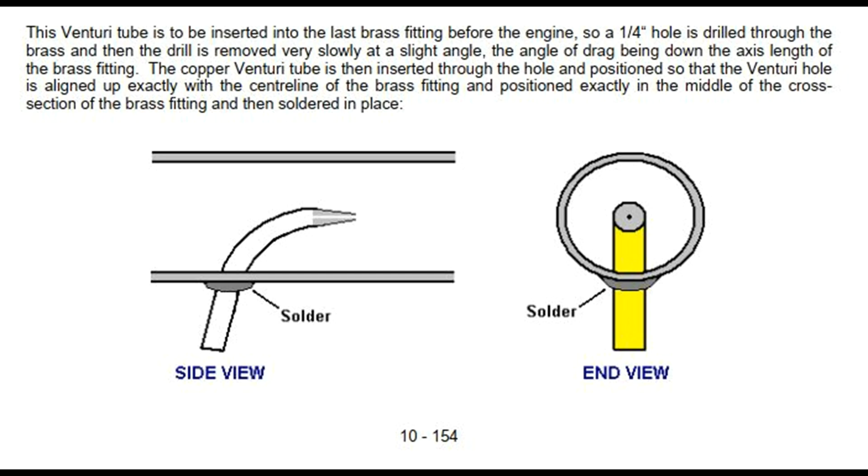This Venturi tube is to be inserted into the last brass fitting before the engine, so a 1/4 inch hole is drilled through the brass, then the drill is removed very slowly at a slight angle, the angle of drag being down the axis length of the brass fitting. The copper Venturi tube is then inserted through the hole and positioned so that the Venturi hole is aligned exactly with the centerline of the brass fitting, and positioned exactly in the middle of the cross section of the brass fitting, then soldered in place.

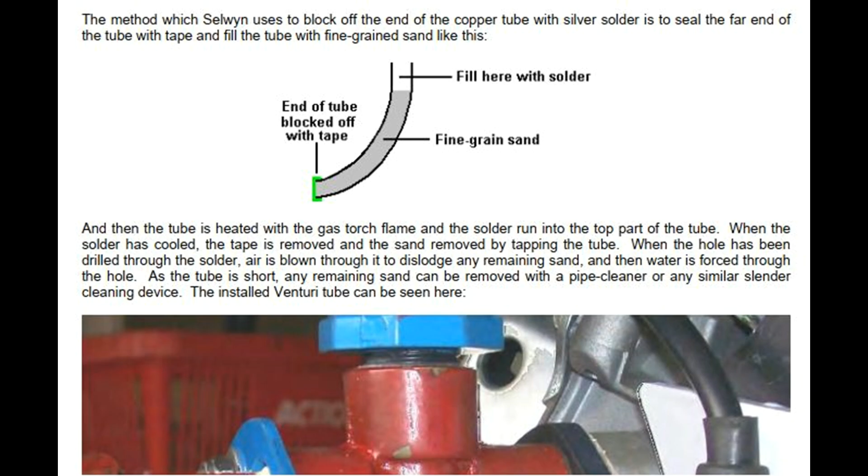The method Selwyn uses to block off the end of the copper tube with silver solder is to seal the far end of the tube with tape and fill the tube with fine-grained sand. The tube is then heated with the gas torch flame and the solder run into the top part of the tube. When the solder has cooled, the tape is removed and the sand removed by tapping the tube. When the hole has been drilled through the solder, air is blown through it to dislodge any remaining sand, and then water is forced through the hole. As the tube is short, any remaining sand can be removed with a pipe cleaner or similar slender device. The installed Venturi tube can be seen here.

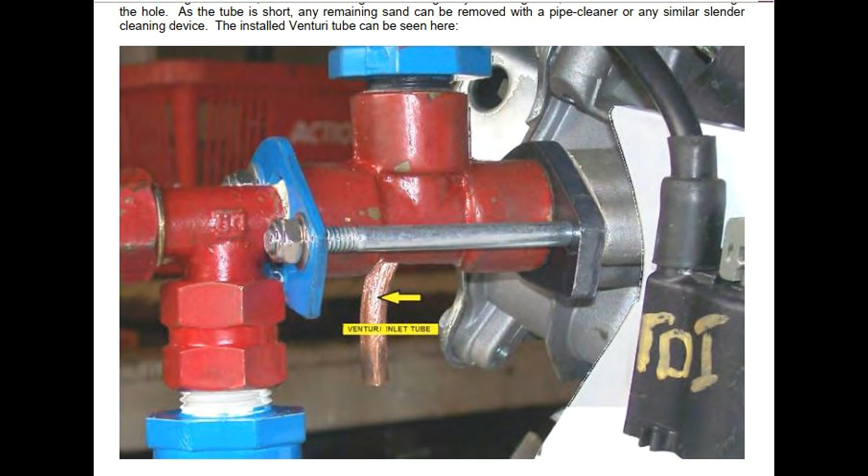The second way to introduce cold water mist into the airstream entering the engine is to use a commercial pond fogger, which can be bought at pet supplies outlets. These have to be powered electrically and housed in their own water container. Some of the more advanced versions float on the surface of the water so that the fog generating section is always submerged to the ideal operational depth below the surface. The generator should run well with 5 liters per minute of HHO gas plus cold water mist.

Any design of electrolyzer can be used. However, when used with rainwater, the Hogg electrolyzer will draw about 1.4 amps per cell, giving a total input of about 115 watts when run on a 12-volt electrical supply. While rainwater is supposedly pure, the reality is that it seldom is, and its ability to carry a current varies dramatically from place to place and even more widely from country to country.

Regarding the water, Selwyn says: 'The water I use is treated in a special way to make sure that the electrolyzer runs at the lowest temperature and amperage possible. For this, using rainwater is a must, and the rainwater coming off a steel roof is best. The water is then treated by inserting a double coil of stainless steel wire into a volume of about 5 liters of water. A supply of 12 volts DC is applied to the coils, and the resulting current is allowed to run through the coils for about 5 hours.'

This results in hot and very dirty water. The water is then filtered using a 0.5 micron filter, making it ready for use in the electrolyzer. If more water is needed, say 30 liters, then leave the coils running for at least 24 hours. I use an old 35-liter beer keg and prepare 30 liters at a time. A major reason for doing this is to remove all the solids suspended in the water so they will not clog up the stainless steel mesh inside the electrolyzer.

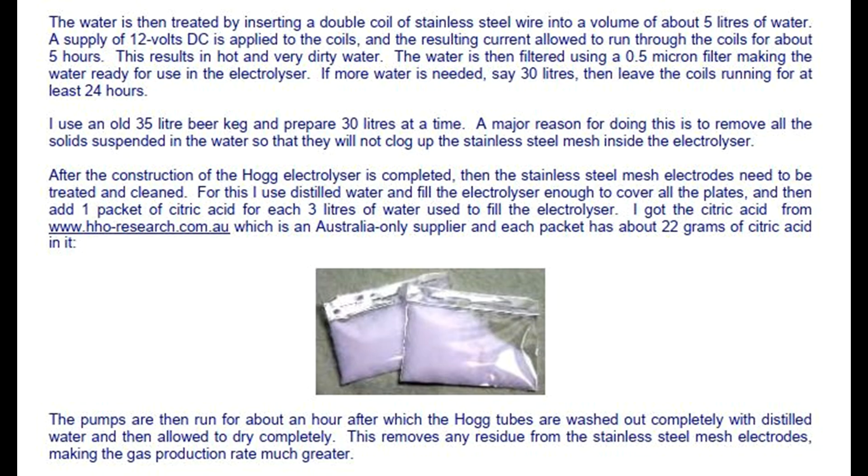I use an ordinary car battery to generate the HHO gas needed to start the generator running, after which a standard battery charger powered by the generator output is used to keep the starting battery topped up.

There are YouTube videos which show generators being operated on what appears to be just HHO gas alone, and while the operation does not appear to be anywhere close to full power, the addition of cold water mist would probably make a major difference to the performance. But it does demonstrate that a generator can certainly be run without using any fossil fuel. The spark circuit in the first video appears to be powered by a small mains unit, but as the generator is lighting a powerful lamp, that electrical input could almost certainly be met by the output from the generator when it is running.